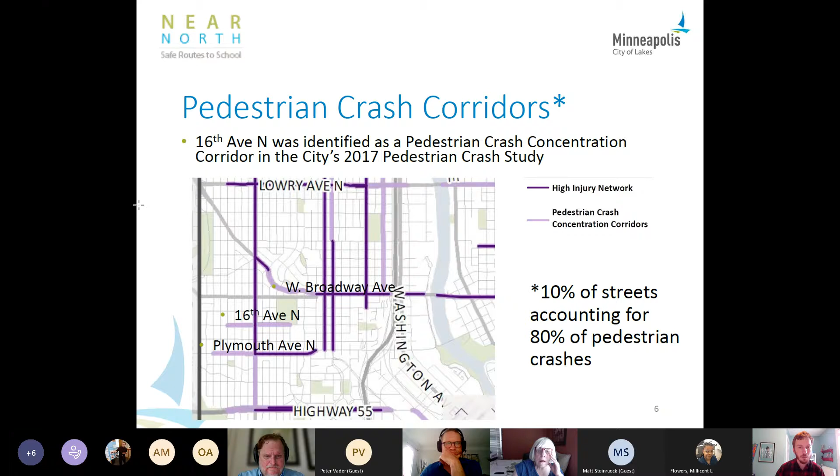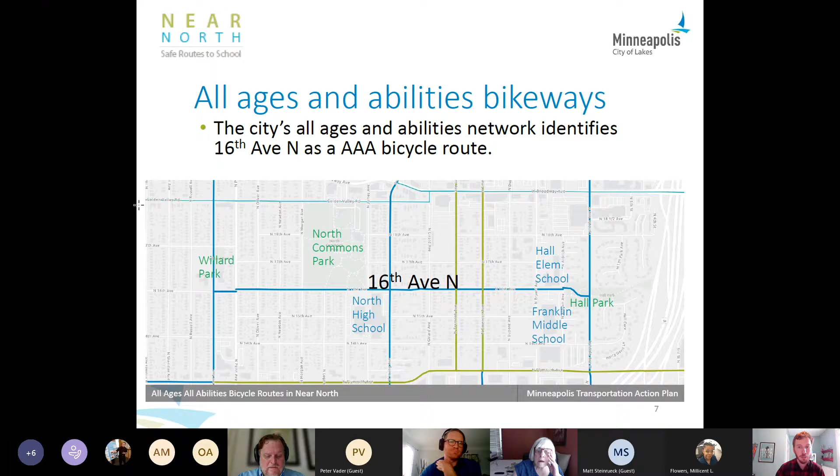This map is showing the safe routes, including 16th Avenue North in the area, and connecting the schools, North High, Hall, and Franklin Middle. You can see from the pedestrian crash concentration map, 16th Avenue near Penn is part of the ped crash corridor. And on the all ages and abilities bikeway map, 16th Ave between Penn and Lyndale is indicated.

Looking at the crash data that's available from 2011 to 15, we had 4 pedestrian crashes, 1 bicycle crash, and 47 motor vehicle crashes in that time period.

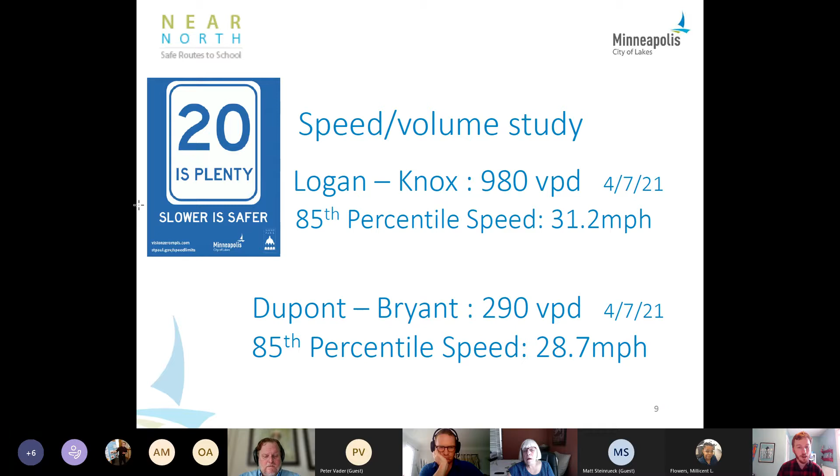Looking at speeds and volumes, from Logan to Knox near North Commons Park, we had an 85th percentile speed of 31 miles an hour. That's pretty fast, especially for a residential street, that's more like you'd see on a busy street like Penn or Emerson Fremont. The volumes are maybe a little bit high for a residential street, but not anything out of the ordinary for a bike boulevard, about 980 vehicles per day between Logan and Knox.

Some of the treatments we're using to slow down this traffic in this project would be mini traffic circles. That's a go-to tool we use in the toolbox to slow down traffic at intersections, especially on bike boulevards.

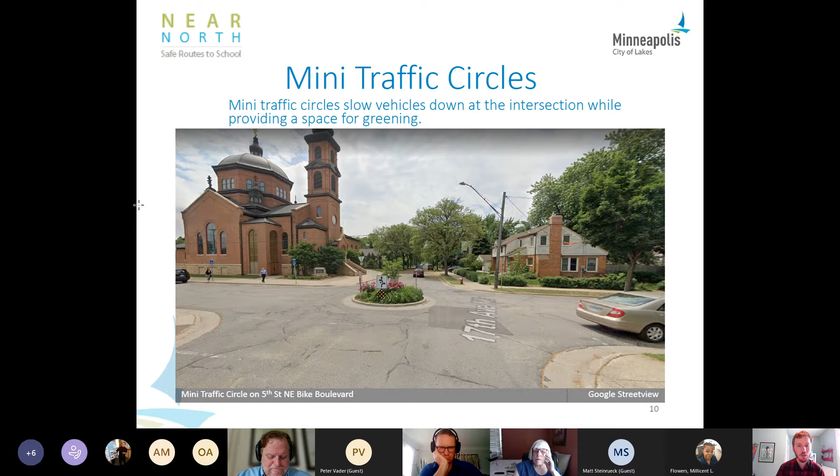Starting from west to east, Queen Avenue North is a connection point with the Queen Avenue Bike Boulevard. There'll be improvements there as part of that project, but we'll look at updating the ped ramps at that intersection. Penn Avenue was already reconstructed, so it's already improved with curb extensions.

At Oliver and Newton, where traffic is coming into the neighborhood from the west, we have mini traffic circles at that location to slow down traffic and create a gateway effect.

Near North Commons Park, on either side at Morgan and James, we have raised crossings to slow down traffic where students cross from North High to North Commons. They use the ball fields at North Commons for after-school practices and that kind of thing.

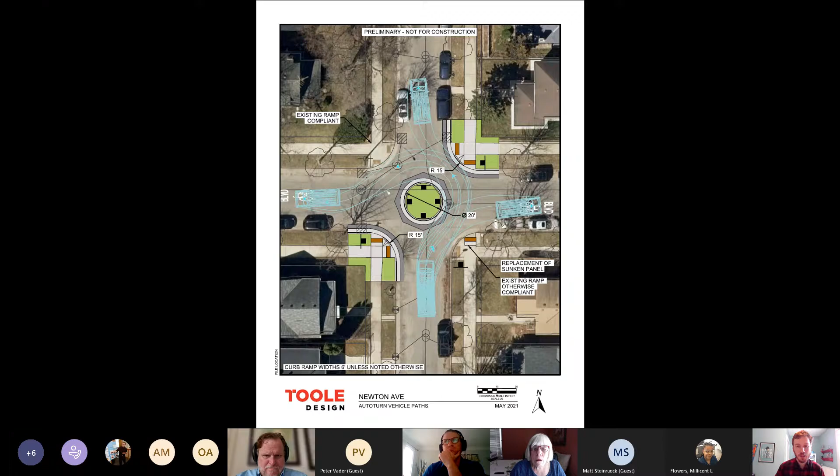As you can see here, we're updating the ped ramps as well, where those are out of date, and you see the Bike Boulevard stencils that we'll be placing along the route as well.

And then here at Morgan Avenue, at the edge of the park, there's a raised crossing, and we would likely do curb extensions to really choke down the street and emphasize that raised crossing. And here you see that as well with the delivery van design vehicle.

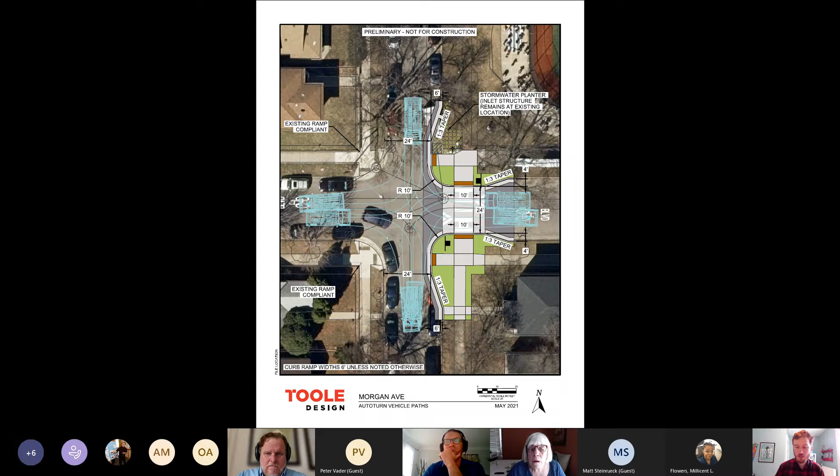So a couple of engagement events we have coming up. We just had the open house last night. And then we have a meeting with the Loppet cyclists, a student cyclist group, and then some North High after-school students that we'll be meeting with in the near future. Zan Associates is running that engagement for us.

And then later this summer, we expect layout approval in July of this year. We'll be wrapping up with engineering later this year and into next year, and construction is summer of next year, 2022. So that's my presentation, I'll take any questions that you guys have.

I have a general question, not specifically about this project, but maybe you can tell us for this project. Do you have a budget now for this, or does that evolve when the engineering drafting and specific designs are done? Or are you locked in with a budget now before citizen feedback, or does that happen afterwards? Can you talk a little bit about the funding and when it's locked in on a project like this that's got a lot of pieces to it?

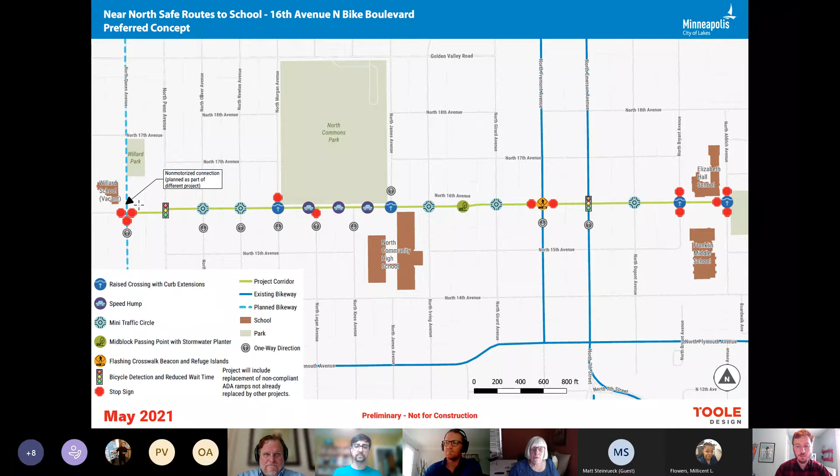Any other questions for Forrest at this time? Okay, are you looking for something from us, Forrest? Do you need a resolution? Sure, this project's at 30%, so a resolution would be good at this time. That would be great. Okay, I will work on putting something together and share it out with the executive committee. Okay, thanks, Aaron. All right, thank you, Forrest, we appreciate it. Thank you.

Now we're going to move to Matthew and the 2022 Hennepin County HSIP Safety Project. Yes, I'm going to introduce this project. On behalf of the county, I took over as a point person when Abdullahi left the city to go work for MnDOT. So I'm teaming up with Hennepin County staff, Olagoke Afolabi and Kelly Augusto, who's also on the call, and they are going to share a drawing. There are 5 different intersections. I guess we would look for a resolution today because it's in that 15 to 30% range, probably just shy of 30%. But with that, I'll turn it over to Olagoke.

Thank you, Matthew. All right, just give me one quick second here. Okay. So as Matthew mentioned earlier, this is a 2022 HSIP project in the city of Minneapolis, and it's an intersection project. 5 total intersections, one of them at Cedar and Lake Street, and 4 intersections along 42nd Street.

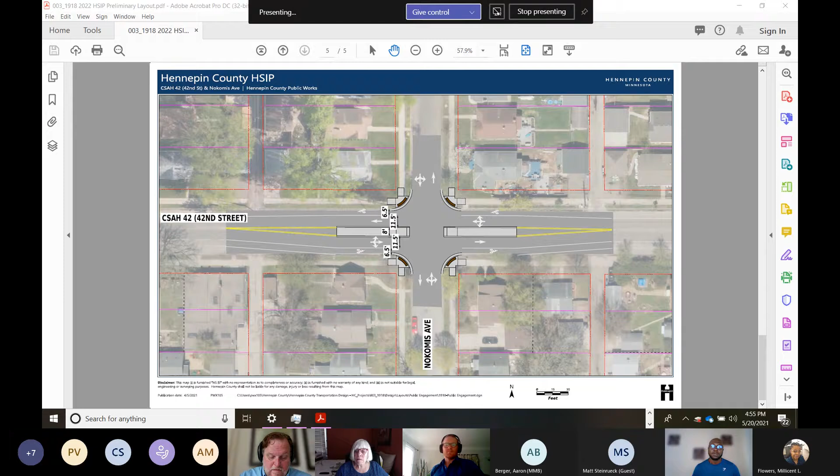As we write a resolution, are there any aspects of this that you're looking for particular feedback on, or are you at a point where you're looking for a resolution of generic support? What are your thoughts, Matthew? I'd say start with the generic, and if you have specifics, add them. That'd be my thought. Thanks.

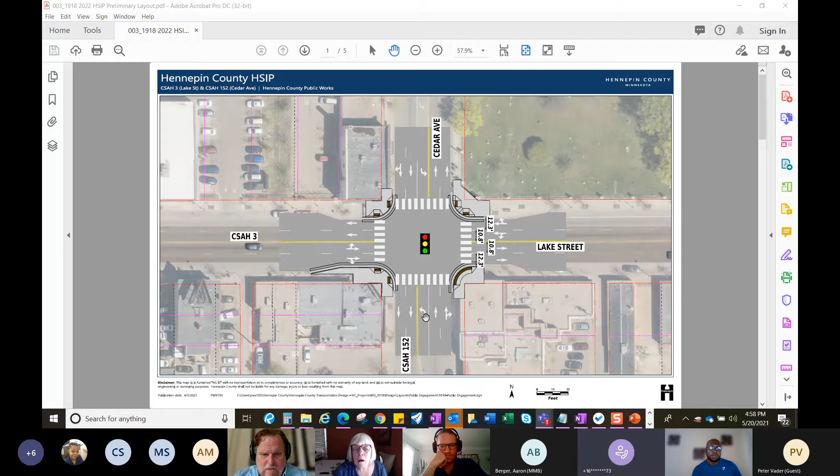I am a little curious about Lake and Cedar, and if you already answered this I apologize, but that's an intersection I walk fairly frequently, and it seems like the improvements are minimal there. Cedar is over and over just such a dangerous street. Is there any flexibility being built in, assuming that at some point we won't be okay with 5-lane speeding highways through our densest areas? Or what are you doing that's innovative, knowing the restrictions that currently exist?

We have been getting comments about Cedar being that wide, and we will take those comments back and discuss with the design staff as well as our traffic staff to see what options we have, if there's a possibility of creating a bump out. But we really didn't look at that when we were putting this layout together. Now that we've been constantly getting comments about Cedar being too wide, we'll take that back internally and see what options we have.

Excellent. I'm also wondering about eastbound 21. When I take that and there's a light at Cedar, the bus is a bit of protection when the light changes and it's still there, because drivers can't turn right. That's often the dangerous movement, the right-turning drivers on red. Is there anything that might happen there so the bus could stop as an inline stop, like by pulling the bump out further back?

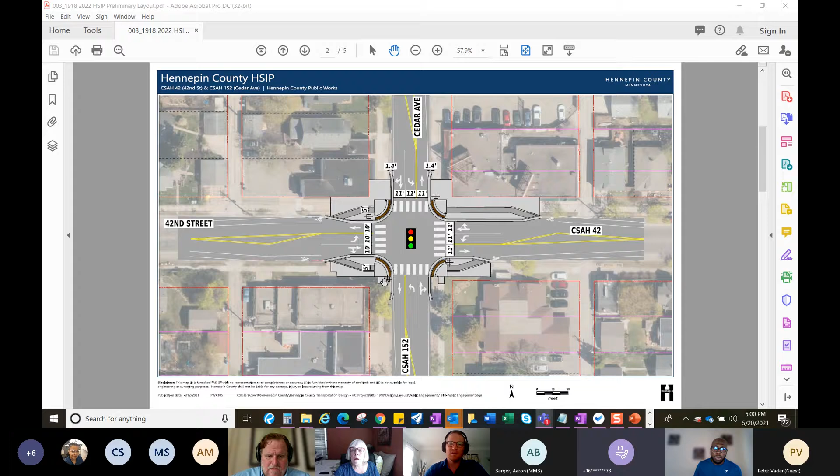Which are you talking about, this intersection or this one? Sorry, I'm just on the phone here, but I'm looking at the layout on my computer screen, and might try to get onto the next call. But it's basically the southwest corner, the north side of that block, where there's a bump out into Lake Street.

So the eastbound 21 right now stops, and it feels like an inline stop. It feels like it prevents drivers from doing an immediate right turn without looking, since they're only looking left for Cedar when I have a green to cross Lake Street. Right now the bus feels like a protection there, and I'm wondering if there's a way of keeping it so it feels like an inline bus stop, or if that's how it'll be set up.

So I should mention that there is a B-line Metro Transit project along Lake Street, and they're reconsidering what options they have in terms of the location of the bus stations at this intersection. That hasn't been finalized yet, but that's a comment I can take back to Metro Transit as we coordinate with them at this intersection.

So if I'm understanding your question, you are looking to make sure the bus can stay in the through lane to prevent drivers from trying to make a right turn. Did I understand that correctly? Yeah. Yep, and also for other reasons, but yes, in this case, yes. Thank you, and I had completely blanked on the B-line thing, so I appreciate that reminder. Awesome, thank you.

Any other questions, Barb? I didn't have a question, I just have a comment. I really like, I live very close to Nokomis and 42nd Street, and we use that all the time, walking and driving.

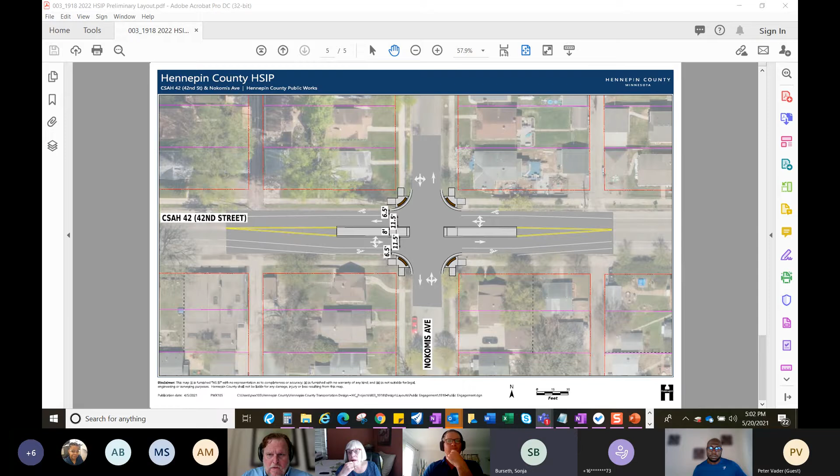Hi, yes, thank you. If you wouldn't mind going back to the Lake and Cedar layout, I just wanted to add on to what Julia was saying. The current eastbound 21 stop is near side of the intersection, on the southwest quadrant. It looks like that bump out is long enough to reach the back door of the bus, which is great, and it'll also provide extra space for amenities like the shelter we have there and widen the path. I just thought I'd add that. That's awesome, thank you.

Are there any other questions at this time? Is it possible to tighten the Lake Street lanes up to be narrower than 12.3 feet and 10.8 feet? We can take that comment back and look into what options we have if that's a possibility. That would be great if we can get down to 10-foot lanes for all of them. I mean, that's still 50 feet for Cedar, which is a huge crossing distance, but that would be great.

Thank you. In terms of lane width, typically the county tries not to go lower than 11 foot, but sometimes we have certain scenarios where we could go slightly lower. Some of these dimensions you see here, especially the 12 foot lanes, aren't the actual travel lanes — sometimes those include the curb pans added to that dimension. But in terms of reducing the lane entirely, we'll definitely take that back and see what options we have if that's a possibility.

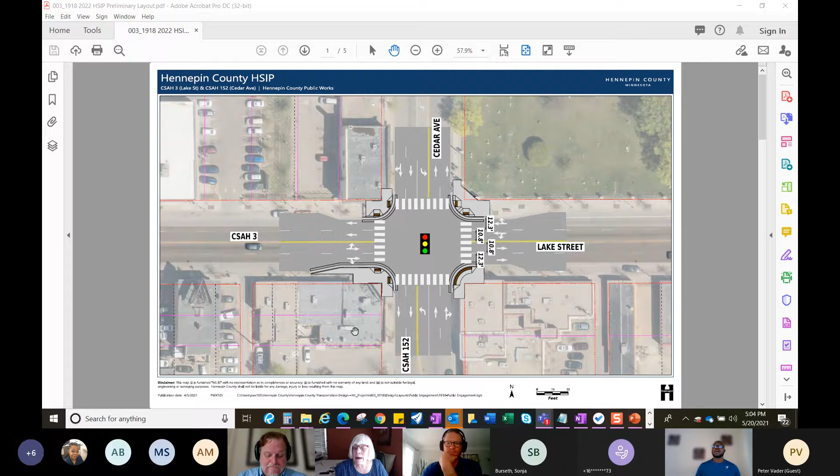That's great, and whatever we can do to have your back on that, I think the PAC would support. Sounds great, thank you very much. All right, okay, I'll stop sharing my screen now. Okay, thank you, Matthew, thank you both. Thanks all.

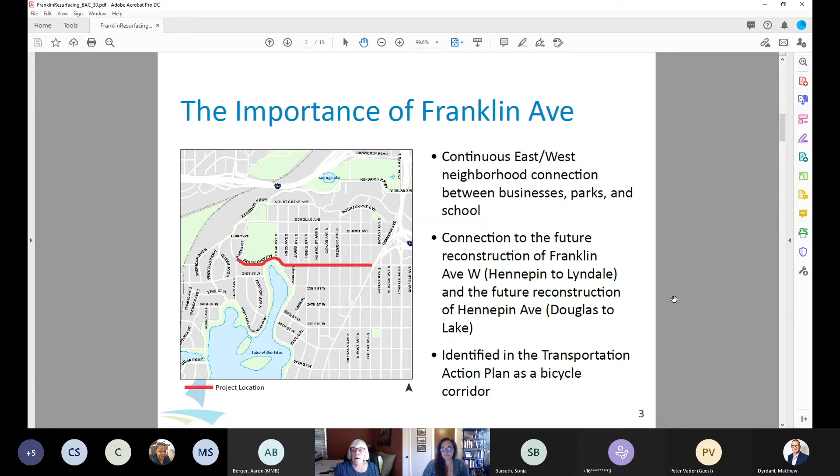Back in fall of 2020, we did some initial outreach to the neighborhood and businesses along this corridor. What we heard during that time were four main themes: the desire for slower vehicle speeds, the need for safer travel, that existing parking is in really high demand and very important for both businesses and community members, and that we need to maintain access for businesses and residents.

Taking that, we developed these project goals: first and foremost, to improve the safety and predictability of all people, regardless of their travel mode. We'll also aim to maintain all existing on-street parking due to the high demand, redistribute the space to help balance the needs of all users, maintain access and mobility for residents and businesses, and support active transportation options.

Currently along Franklin Avenue, this stretch has a 25-mile-an-hour posted speed limit as of April of last year. We did a speed study back in August of last year, and what we found was that speeds were significantly higher than the posted speed limit, the highest being at one of the three locations where we got speed data, between Girard and Humboldt, where we saw up to 33 miles per hour in the 85th percentile speeds.

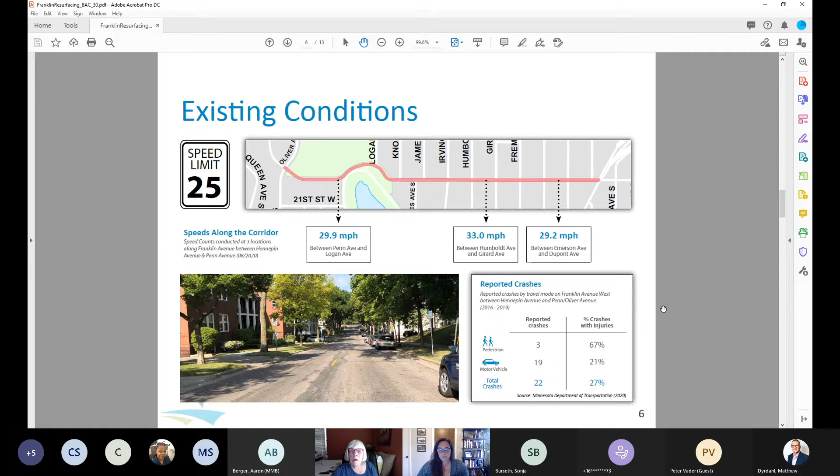Along this corridor, there are both opportunity areas and some more challenging zones. Within the opportunity areas, those are places where we have an adequate amount of space, curb to curb, to reduce the travel lanes to 10 feet and implement standard on-street bike lanes. For those challenging areas, there's just more demand for that street space, more uses, and a limited amount of space.

Those two areas are highlighted here, areas where we do have existing on-street parking: between Dupont and Fremont on the east side of this corridor, and between Penn and just west of Lake of the Isles as well.

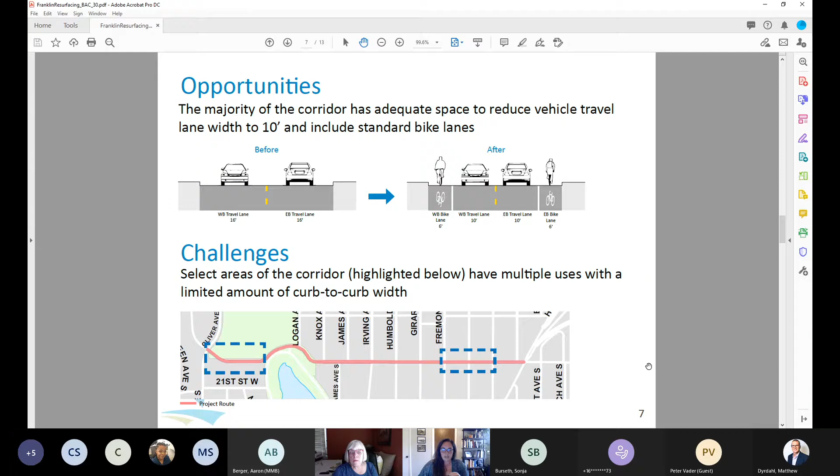Looking at these two zones, taking our policy, our technical analysis, and the feedback we've heard from the neighborhood, we've developed a concept for this project. Given the different characteristics of the opportunity areas and the more challenging zones, we're proposing two different types of bike treatments along this corridor: standard on-street bike lanes where we have adequate space, and advisory bike lanes in areas with existing on-street parking. This allows us to maintain parking for residents and businesses while still providing network continuity for cyclists.

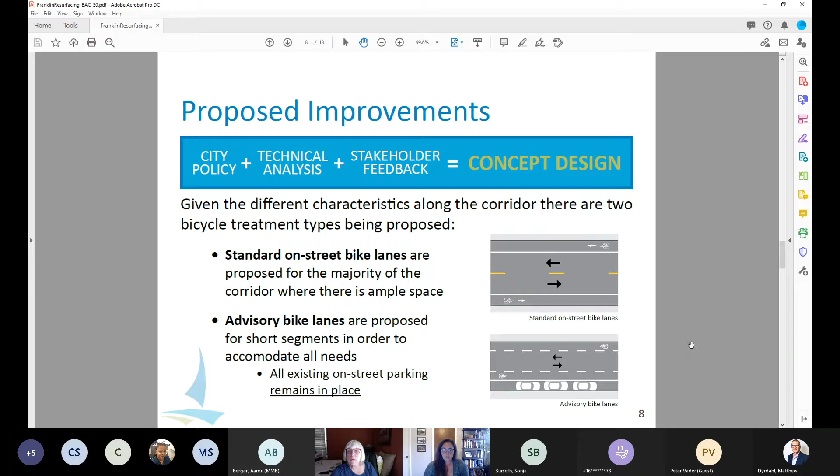For those who may not be familiar with advisory bike lanes, it's a type of shared roadway where you can expect mixing, merging, and yielding. Research shows that this type of bike treatment encourages slower vehicle speeds and reduces crash rates. We're able to maintain on-street parking, which we wouldn't be able to do with standard lanes. This also provides dedicated space for cyclists within the roadway, helping provide network continuity while also getting cyclists off the sidewalks and improving the pedestrian experience for those on the sidewalk.

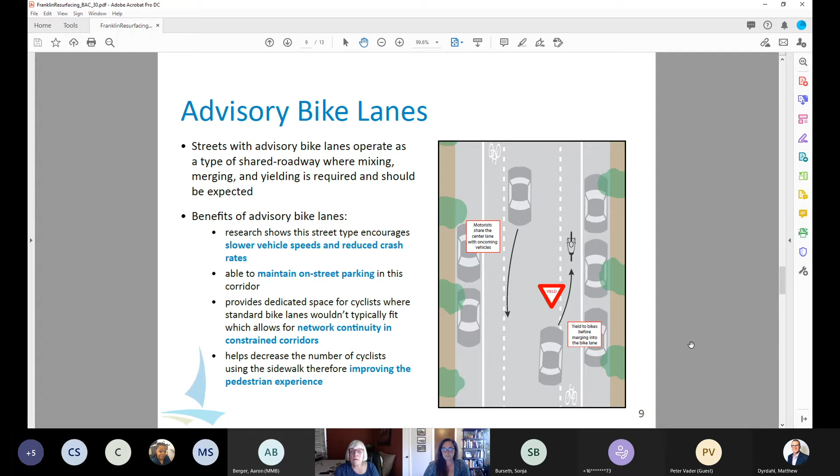In terms of timeline and next steps, we've been working through this concept since fall of last year, through the winter, and recently going back out to the public with this concept, hoping to finalize the design shortly so that we can have a successful implementation this summer. With that, I'll open it up to any questions or comments.

Thanks, Amy. Yes, Aaron, I think you're muted. That happens to me all the time.

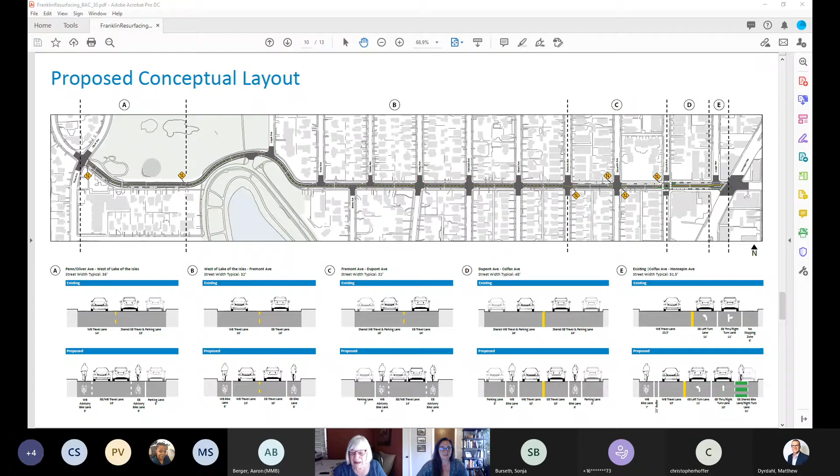Yes, we're here. Can you see my screen? Yes. Awesome, sweet. So my name is Trey Joyner. I'm Associate Planner in TPP and Assistant Project Manager for the Bryant Avenue South project. And I'm joined by Liz. Hi, everyone. So go ahead, Liz, kick it off.

So the Bryant Avenue South Reconstruction project, we're in our third phase of engagement for the project. We kicked off this project last year in spring with our existing conditions and project goal setting, and then conducted a series of engagement events across the summer getting feedback on the priorities of our project goals. Then in the fall, we had our second open house where we introduced the revised two-way concept on Bryant, which included the proposal to relocate transit to Lyndale to better meet the project goals along Bryant.

You can see here that some of the project goals were to improve pedestrian safety and comfort, create an all-ages-and-abilities facility, support existing and future transit in the area, and use green infrastructure to collect and treat stormwater runoff. That was a rather new goal included on the forefront of this project—it's not something we typically include on reconstruction projects—and also to accommodate business deliveries and customer access.

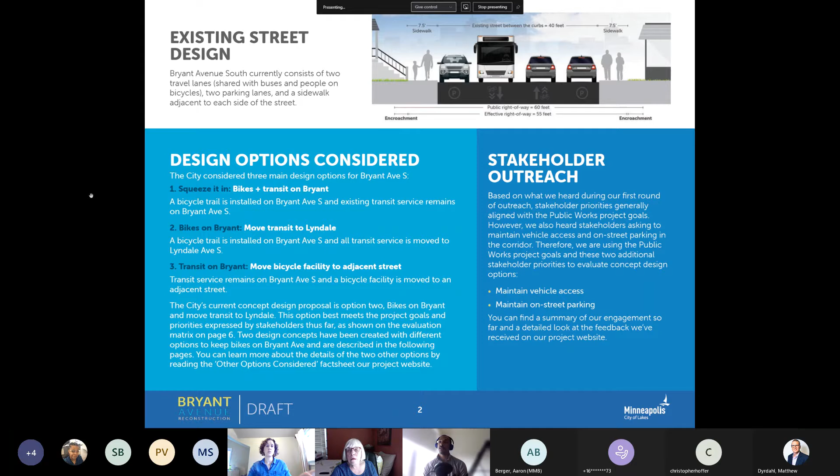For the relocation of a bicycle facility to an adjacent street, we evaluated what that would look like on Aldrich or Colfax. Through the evaluation, we found there was a lot of parking that would have to be moved on those adjacent streets, so to meet our project goals and the stakeholder feedback received thus far, we opted for the bikes on Bryant option.

One thing that came out of our second phase of engagement through community feedback was a strong desire for an alternative option on Bryant that wasn't the two-way design. That's how we came up with our draft one-way proposal on our website today. This one-way proposal still included relocating transit to Lyndale, but included more green space and a wider bicycle facility along Bryant.

This image shows our project goals and the metrics we used to evaluate all the options just discussed. As you can see, the bikeway on Bryant with one-way for vehicles better met a majority of our project goals and the two other stakeholder priorities we incorporated throughout phase one of engagement.

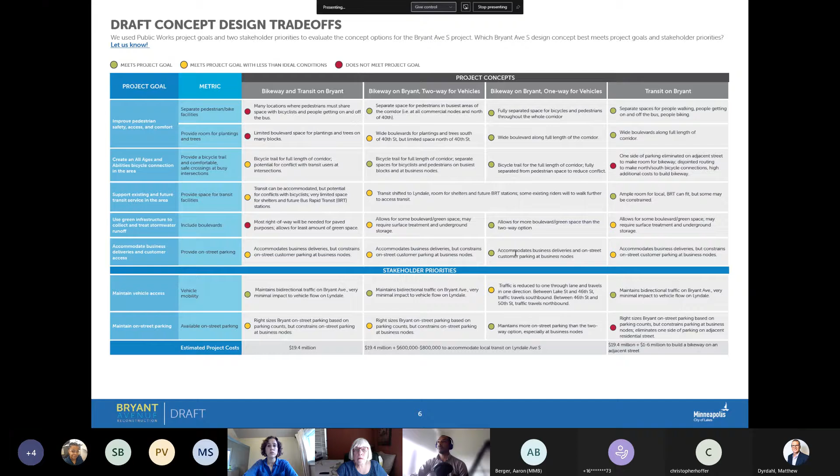Liz, you want to talk about this one? Sure. So if you've been following along since the last time we were here, we came out with that two-way design. In our current round now, we have two options for Bryant.

Our adjusted two-way is a two-way for vehicles, and the other option is a one-way street for cars. We're proposing the one-way in direct response to two main concerns we heard from folks about the original proposal we came out with in December. The first concern was about pedestrian and bicyclist conflicts on the shared use path.

On the two-way, there was a section south of 40th where we proposed shared space for pedestrians and bicycles so we could max out our boulevard space in that area. Under the one-way, we're able to separate out space for the full corridor for bicyclists and pedestrians. You can see this picture here in the right-hand corner, and an example of what that looks like.

The other main concern we heard was about parking availability at business nodes. The one-way allows us to add back in and maintain more on-street parking in those highly used areas. It also lets us add more green space to the corridor, specifically where we need it to treat stormwater. We've done an initial evaluation of opportunity areas for green infrastructure, and under the one-way we're able to carve out more space for boulevard plantings and future green infrastructure.

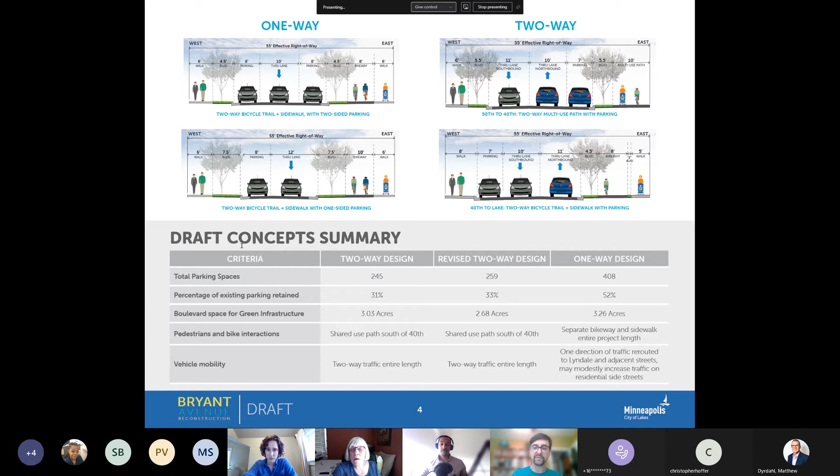Hi, I'm wondering if there's any modeling that could be done to understand how traffic speed would be affected by choosing a one-way versus a two-way option. Modeling on Bryant itself in terms of speeds?

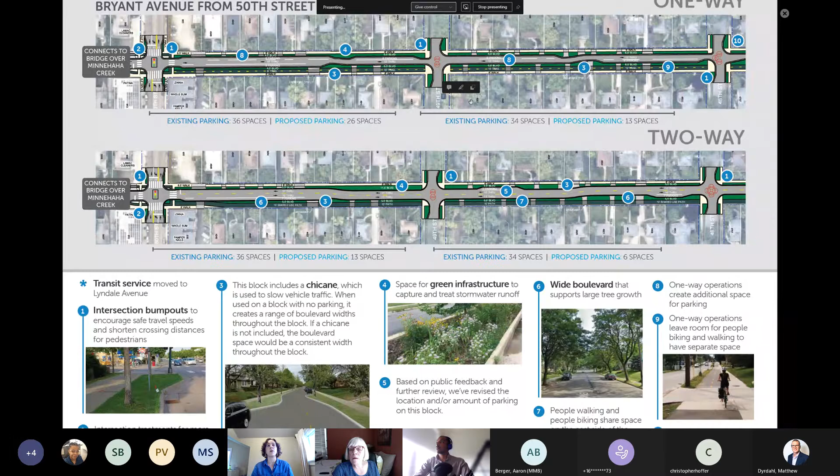Probably not existing modeling that we would look to do, but what we'd really look at is some of our other one-way streets that are much more similar to what this design looks like. We've definitely heard concerns from people about one-ways and speeding, but the examples people are thinking of, like the Blaisdells, the Park and Portlands, are just really wide streets. This design is much closer to a parkway design, where we have constrained, narrowed areas in the middle where we're adding chicanes, elongating those on streets where we know parking usage is low, and a very narrow entrance at each block. So a lot of traffic calming designs that we know work well in our parkways. So no, not modeling per se, but we'd look to existing designs that work well within the city.

Thank you. I'm super curious about, sorry. Go ahead, Julia, that's fine.

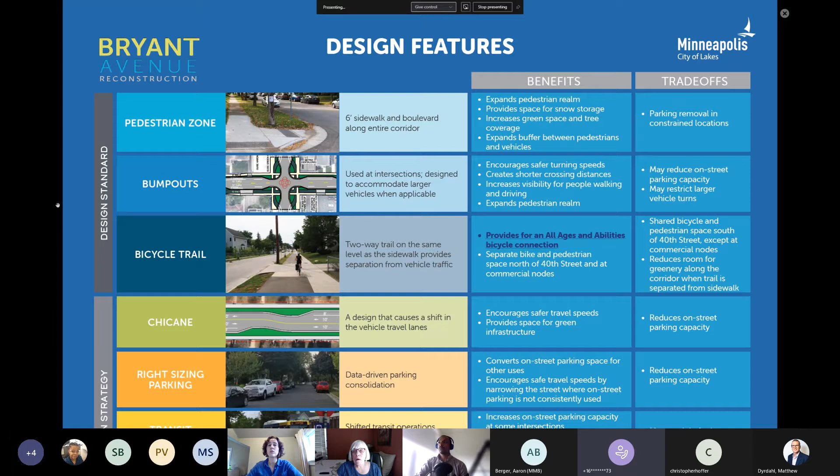I'm super curious about what you mentioned about diverting vehicle traffic from this street onto others. I'm wondering if you've looked at what the air quality impacts would be, what the air quality is currently. It's interesting to me that 20 to 35 vehicles is seen as noticeable for a side street, but 65 to 100, and all the health implications of that, is negligible for everyone who lives along Lyndale. I'm hoping we see our city using the full street network rather than forcing pollution onto our highest density residential corridors.

Nope, we haven't done those types of emissions studies. I'd say that generally, if we're expecting today that there's 2,000 to 3,000 vehicles per day on Bryant, approximately half of those would be diverted to go somewhere else. Potentially they would end up on Lyndale, or potentially people would use a different mode of travel to make some of these trips. But no, we have not done any modeling on emissions.

I'll just note too that going with a one-way design gets us bigger boulevards and more ability to treat stormwater. So while it doesn't speak to air quality, you are getting environmental benefits, or at least stormwater treatment along Bryant for the relocation of those trips.

I'm totally sold on it. I'm just curious, it seems like what we often hear from designers is that we cannot consider side streets as part of the network when looking at vehicle volumes, and pedestrian safety comes at the expense of, heaven forbid, putting vehicles on parallel side streets. This may be more for county engineers than the city. So seeing you do this, I really appreciate it and hope this is what we see more of.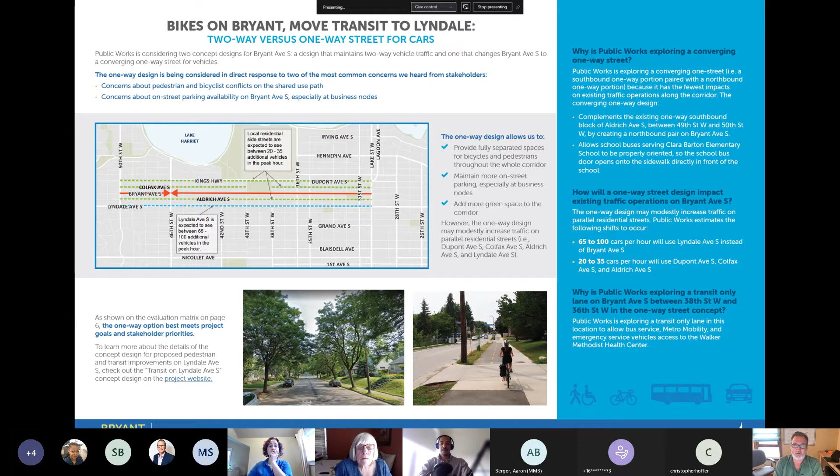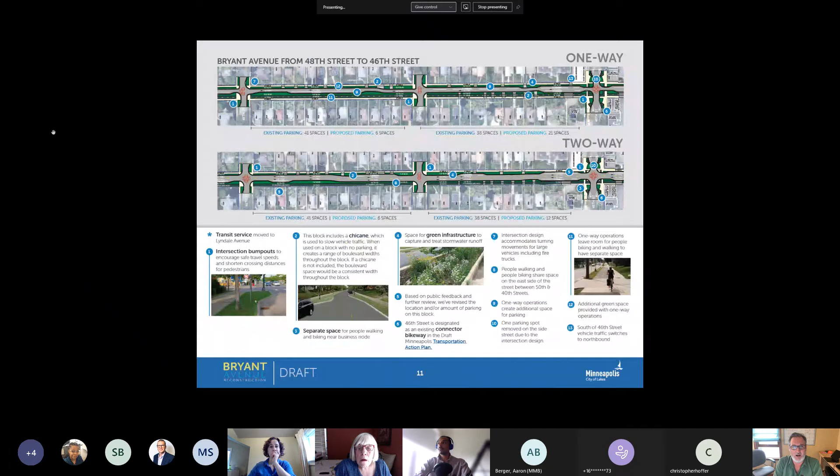On the one-way design, two lanes of vehicle traffic going in the same direction, I was much more heartened about chicanes for a two-way street like Grand Avenue. What other calming methods? I don't think the parkway, in my experience, is pedestrian friendly, that saying city parkways work for people out walking, I don't agree with that. So anyway, do you anticipate more traffic calming, more positive effects on slowing cars down within the one-way design?

I guess I'm not totally following the question. Are you saying, are we looking at more traffic calming with the one-way versus the two-way? That's what I was asking. I made it hard.

Yeah, exactly. Two lanes going one direction means faster vehicles, versus one lane going each direction, so a car coming the other way will slow traffic, will have some calming effect. So that was my question: what, if any, additional calming methods are incorporated in a one-way design?

Sure. I think the biggest one is that we have these really long stretches of very narrow areas in the places where we know we have speeding issues today, which is pretty much south of 43rd or 46th. I'd have to pull my existing conditions, but it's really where we know the parking isn't getting used, so it's where we have that really wide open space.

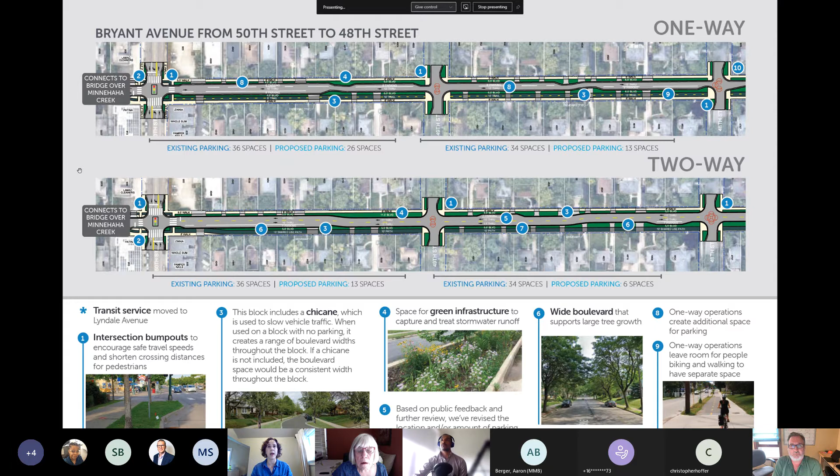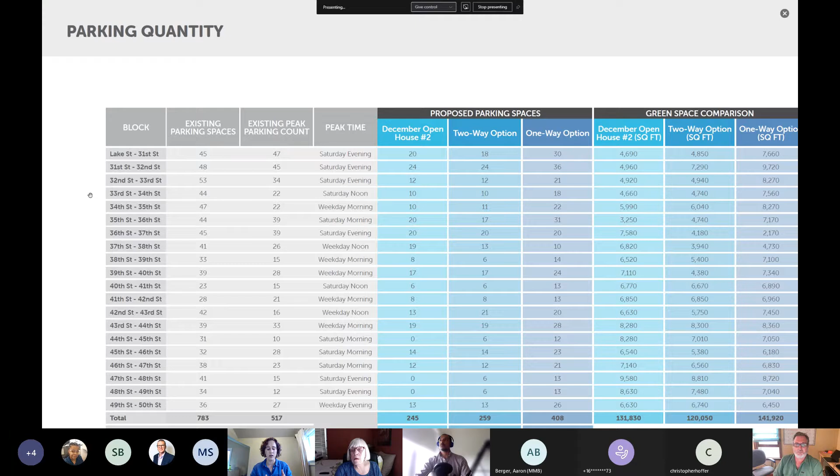Throughout this whole project we're right-sizing parking. We're removing 50% of the parking in the one-way proposal, and almost a little less than 70% in the proposed two-way. So by having those really long, narrow sections and narrower entrances where people come into an intersection, that's the way we're looking to mitigate speeds on the one-way.

All right, thanks, Liz. Barb, I think you're on mute.

Thanks, sorry. My question is the two-way, is it southbound? So all the one-way would be southbound, all southbound traffic? Or is it? Good question, I should have hit on that, I forgot about that in my spiel.

Trey, can you go back to that overhead graphic? So we're actually proposing a converging one-way. What that means is we're looking at a southbound one-way from Lake to 46th, and then a northbound section from 50th to 46th.

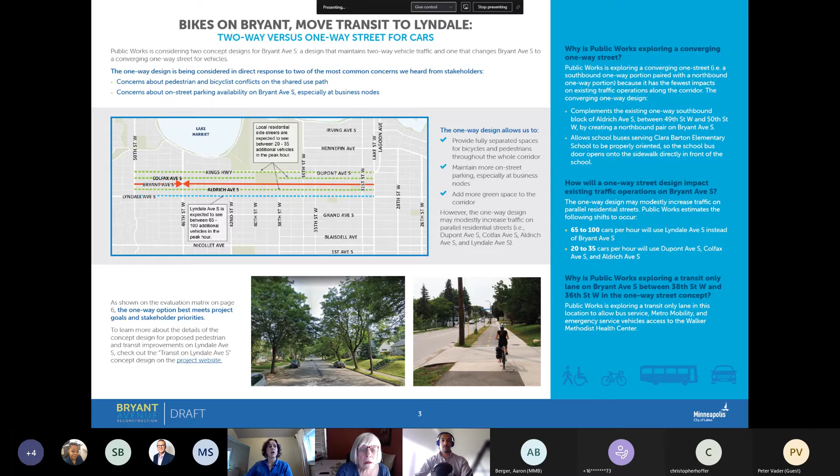Couple reasons why we're looking at that. One, at the outset we did our traffic modeling and tried to see which way people are typically going, if there'd be more spillover with one versus the other. It was kind of six of one, half dozen of the other, didn't really matter if we were looking north or south.

So then we start looking at land use context and what we need to do to serve the existing land uses in this corridor. Really the big one for this big chunk of southbound that we're proposing is Clara Barton School. Trey, can you go to the next slide for me?

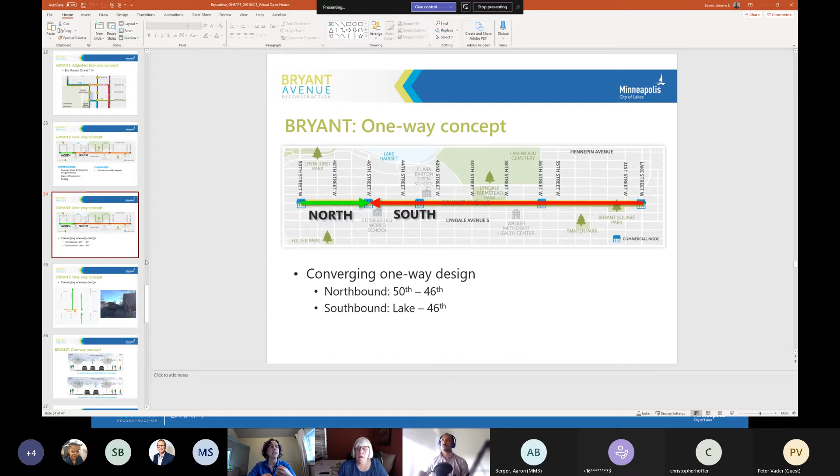Thanks. So, you know, in the background, but if you think about a school bus, it's only got one door on one side. We wanted to make sure that when buses are accessing Clara Barton, they're able to keep that door on the same side of the school. So that was a really big driver.

The other driver was an existing traffic pattern down at 50th and Bryant, where there's an existing one-way pair on Aldrich, actually, between 49th and 50th. That's to help with cut-through traffic and speeding for people trying to get around some congestion at 50th and Lyndale. So we're trying to avoid having two adjacent one-ways right next to each other.

But then the other reason is that at this intersection at 50th and Bryant, for people visiting the area by car, being able to access the parking on the block between 49th and 50th - so if you're accessing a regional destination, coming on the regional system from 50th, you'd be able to turn north onto Bryant to get to some of that parking. So those are kind of some of the big drivers behind the converging one-way proposal.

Other thing to note is that people are really making short trips on Bryant. Only 4% of trips on Bryant are actually going end to end, the way people use Lyndale for. What we saw on Bryant is that people cut over on 46th, or cut out on 43rd, go to a specific destination, and only go a couple blocks and then leave Bryant. So it's not like we're seeing really long trips happening on Bryant.

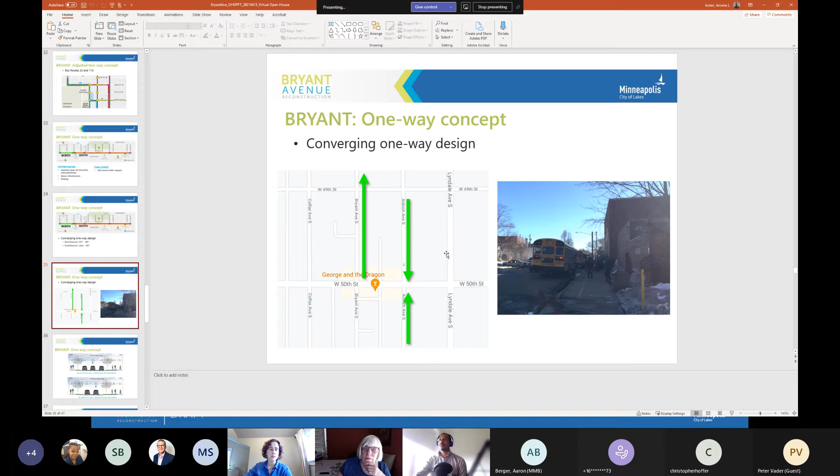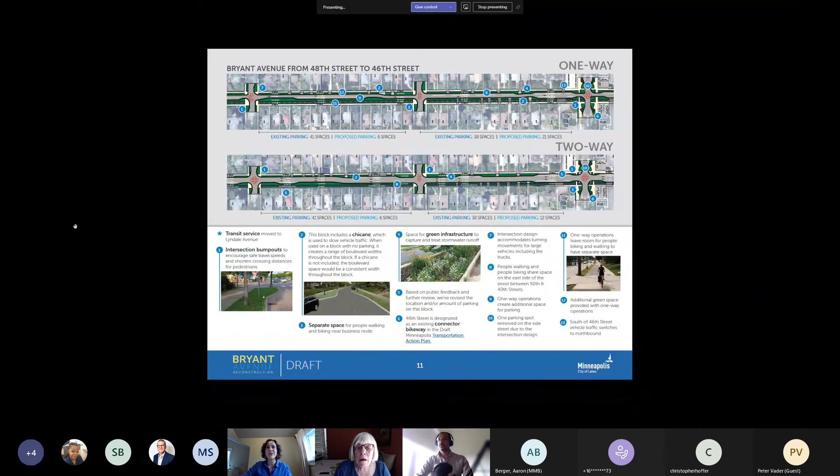What is the lane width? Is it 10 or 11 feet? What are you proposing for the one-way, the two lanes? Hold on a second, sorry, I can't see that for some reason. Let me scroll in here. It's really little. Oh yeah, I'm scrolling in. Yeah, I got you. Okay, cool. Oh, big. So that's the two-way.

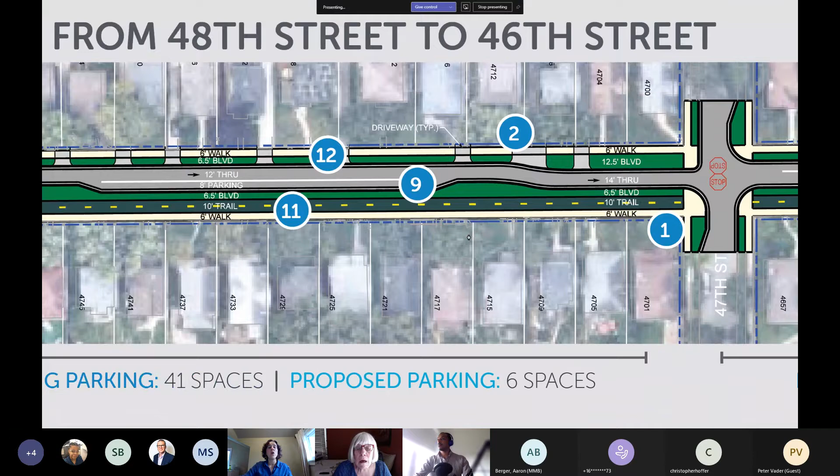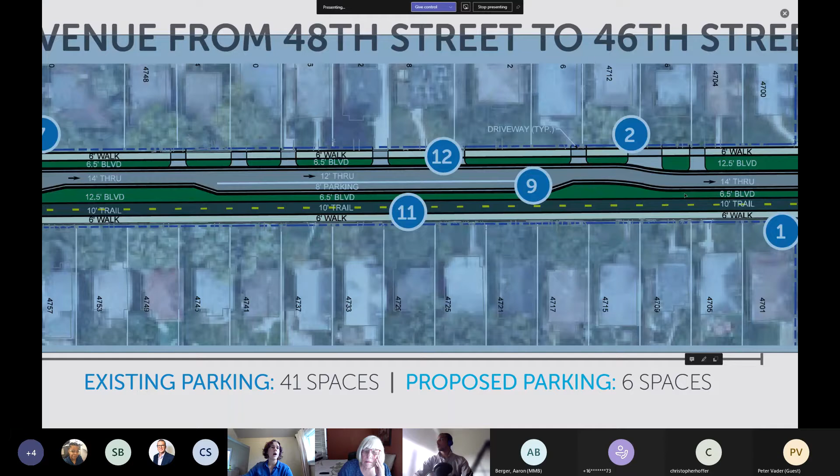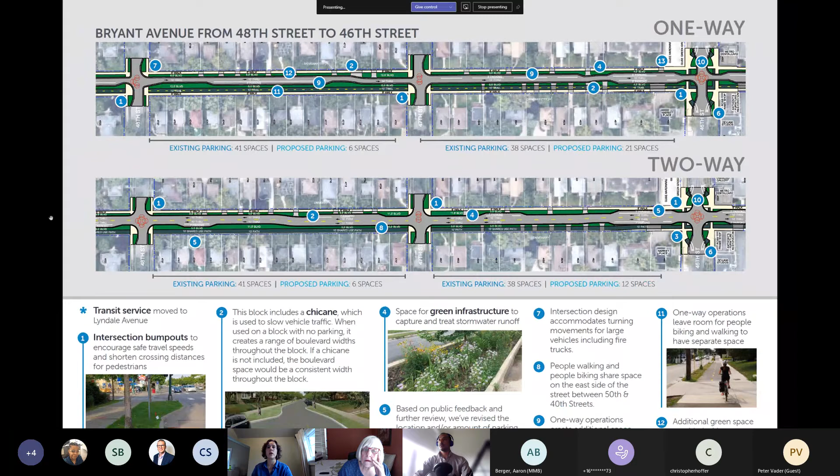So at the narrowest section, it's a 14-foot lane, which is inclusive of a 2-foot gutter on either side. When it's adjacent to a parking lane, it's a 12-foot through lane, but for you guys in the know, it's a 10+2, so a 10-foot through lane with a 2-foot gutter pan. And then when it goes down to parking on two sides, it goes to a 10-foot through lane if we have two parking lanes on either side.

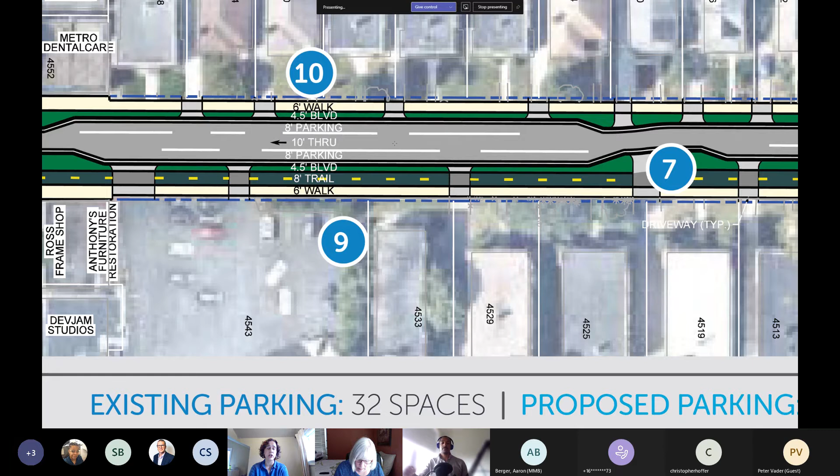Okay, and you're going to be coming back. You're at 15%. Will you be coming back, Liz? So this is 15, we're getting really close. We are planning on coming back with a final 30%. Okay, and that's when you'd like a resolution at the 30%?

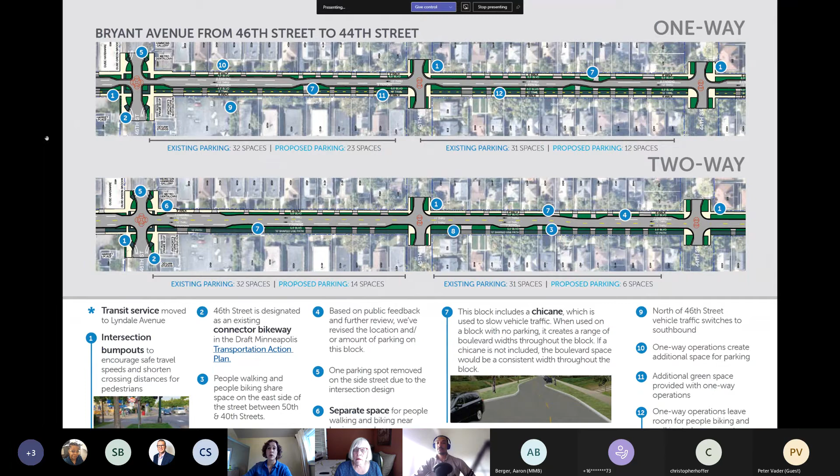Actually, I think it'd be probably more helpful now, frankly, if you guys wanted to weigh in on the one-way versus the two-way, and then just the overall idea to move transit to Lyndale, because we also have a whole bunch of information on that. If people are interested, check out online. But that is a huge piece of this as well.

Any other questions? And just for Liz and Trey, I think the committee would plan on having that resolution ready for the full committee meeting coming up. So we'll get that to you. Okay, great. Awesome. Thanks, Matthew. Okay, thank you, Liz. Thanks, everyone. Thanks, Trey. Thanks, Liz. Thanks, everyone. Have a good night.

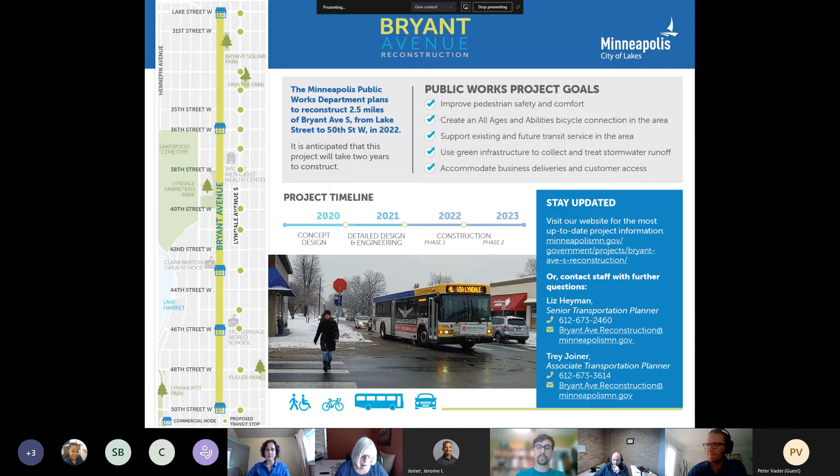You too. Okay, last but not least is the Upper Harbor Terminal on 33rd Avenue at 15% with Alexander Cato from Minneapolis Public Works, and Ciara and Chris from Toole Design.

Hey everyone, Alexander Cato here. Can I get a thumbs up if you can hear me clearly? Great, awesome. So first of all, thank you all so much for having us here today, and for all the work you all do to ensure that the designs the city puts forth are bicycle and pedestrian friendly. I have Ciara and Chris from Toole Design on the call with me as well. We'll be talking about this design as briefly as we can and then opening it up for feedback from you all. This is a bit unique.

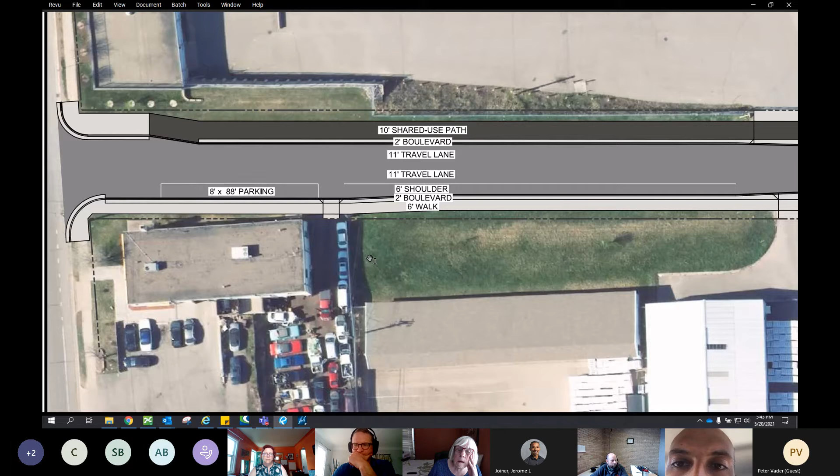Chris, if you want to just- yep, Libra's right there. They have about 25 trucks a day, so they're doing a lot of in and out movements as well. So the roadway design accommodates that.

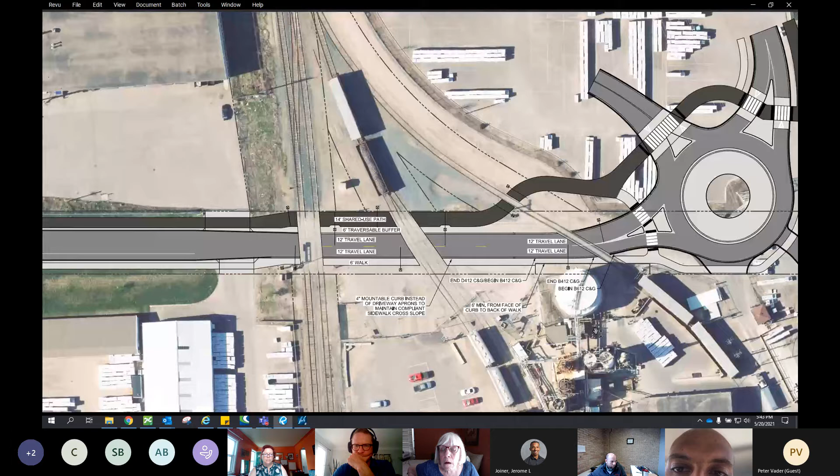We also have a 6-foot sidewalk here. This carries to the east across the tracks and continues into a roundabout design as well, which goes into the Upper Harbor Terminal site.

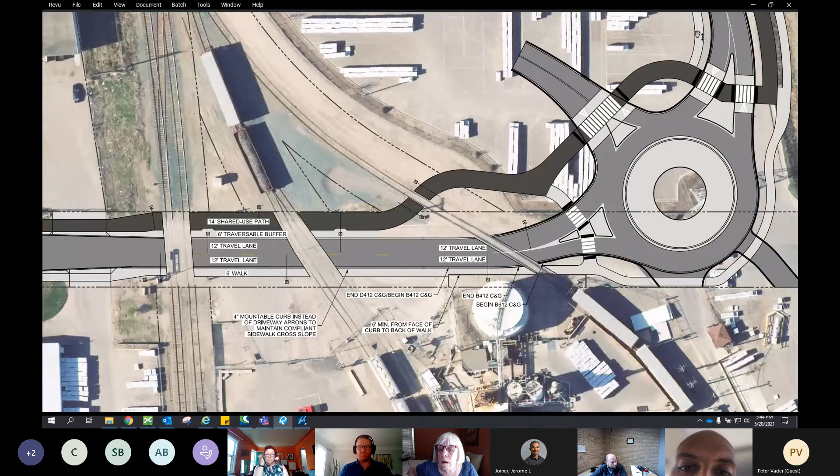The real crux of this design, and you'll see how it differs in the second design, is we have a sidewalk on the south. It's passing this GAF facility, which has a lot of truck activity. And the real crux, to be honest, is do we feel safe having pedestrians travel along this portion of the roadway, knowing the amount of truck activity that is occurring? If you want to move to the second option, Chris.

There you go, Chris, that's the second one- move to the second. Yep, what's up? This is option B. Oh, I'm sorry, or the first one. There we go, without the sidewalk.

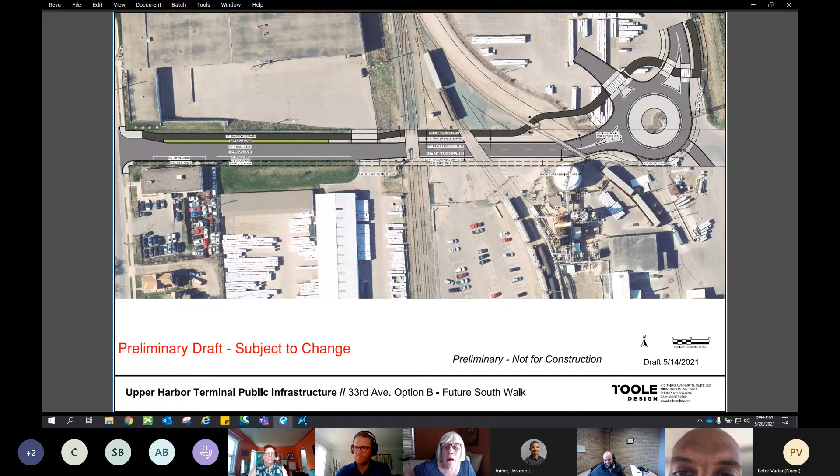Okay, thank you. So in this option, we removed the sidewalk to the south, expanded the boulevard on the north so there's a bit of a green buffer, and left the sidewalk for a future development as an alternative option. So there are really two options: one, we keep the sidewalk in; two, we take the sidewalk out.

From a city policy perspective, there is some flexibility. Section 3.2 of the street design guide talks about the inclusion of sidewalks and says sidewalks should generally be included on both sides of any newly constructed street. Streets that may require sidewalks on only one side include a street with a severe topographic constraint that makes installing a sidewalk prohibitively challenging. The southern side does have a berm in place that adds a lot of grading challenges with the sidewalk, so there is some flexibility. I think generally city policy likes sidewalks on two sides of the street. We have that as an option, and really just want your feedback on that.

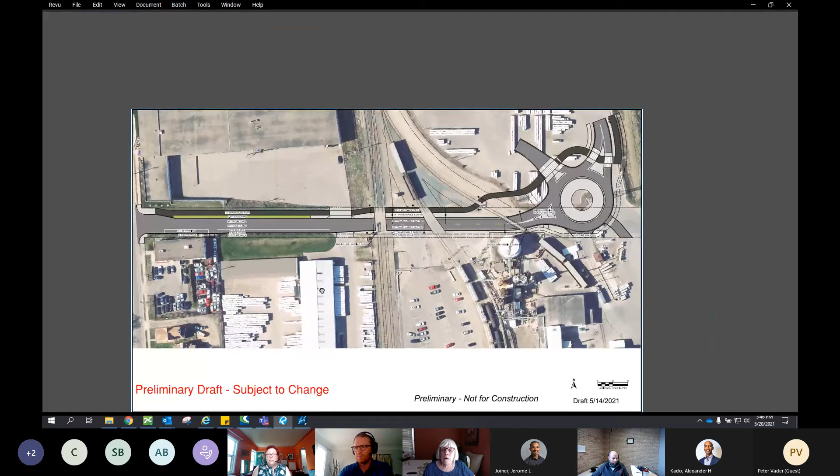I will transition it now to Chris and Ciara to provide a bit more detail on these designs, as they were heavily involved in that. All right, thank you, Alexander.

Just a few more details to point out, which are on both. So Chris, just go ahead and keep this up. You may wonder why the shared use path squiggles so much. There are active rail lines in this area, and so that is intended to square up the crossing across the railroad tracks and then provide a more direct path to the roundabout.

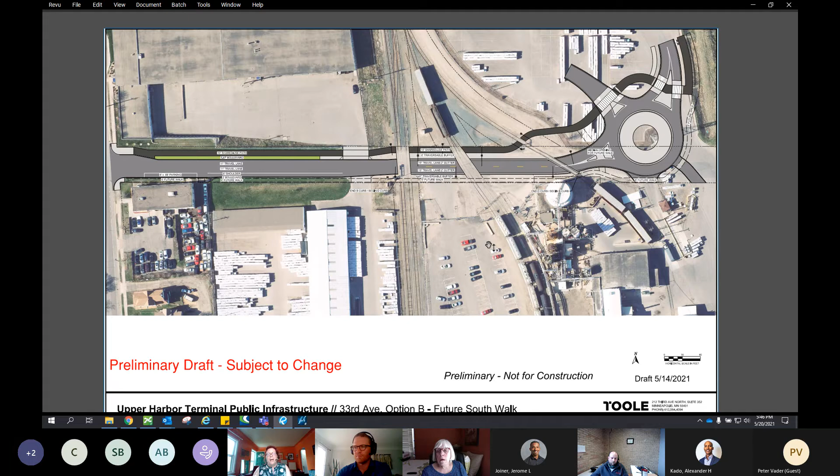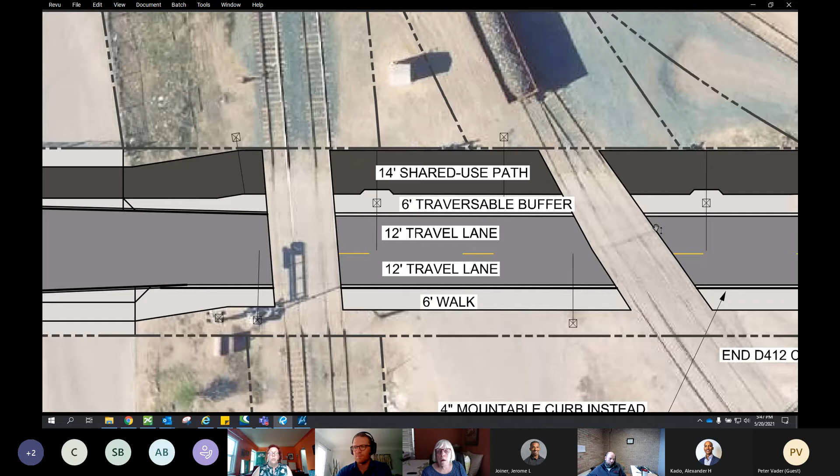I want to mention too, in option A I think you'll see a 14-foot wide path, and in option B it's 10. It's not like we have to say oh, we can't do a 14-foot wide path. There's just some considerations with the active rail crossing arms because they do kick out when they go down, and so with the wider shared use path there is kind of a jog that may not be as intuitive for navigating, especially if people have vision impairments. So it's kind of a notch in the shared use path.

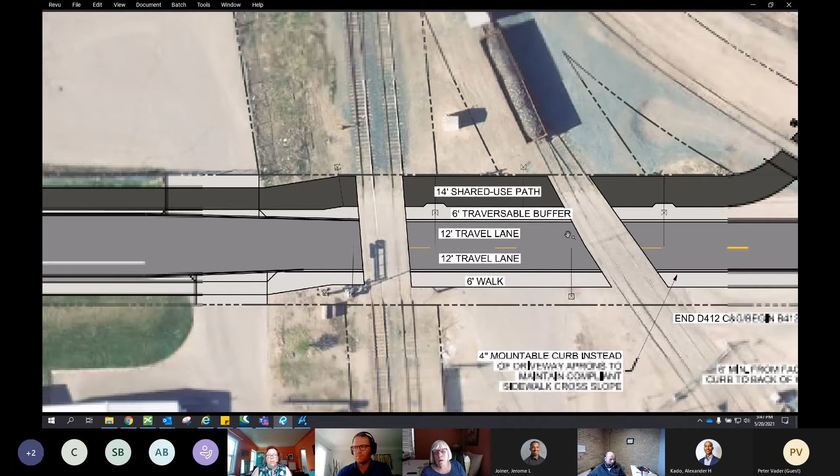Then if we go further to the east, I wanted to point out that the crossings of the shared use path are raised. There will be a lot of truck traffic again using this roundabout to access the private development within the Upper Harbor Terminal site. And as Alexander mentioned, GAF has some loading docks and access points along that roundabout as well. So wanted to point out some of those design details.

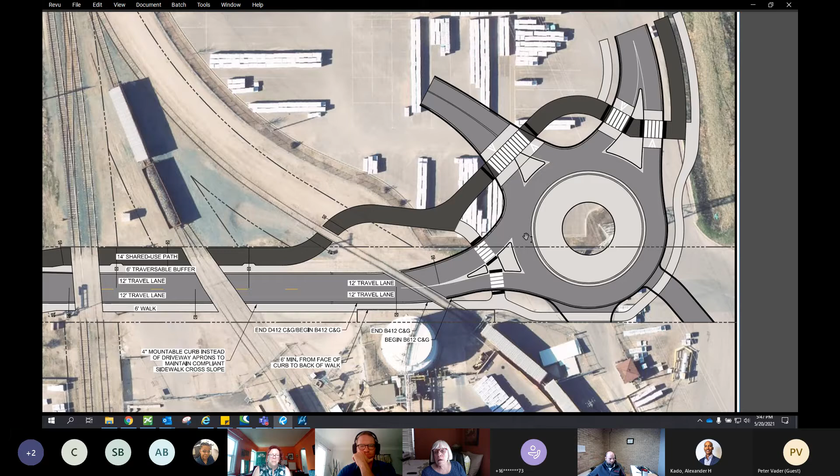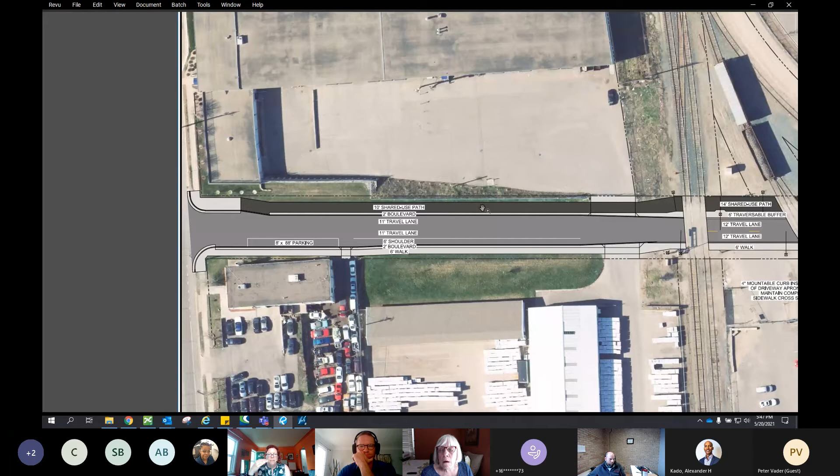And then Chris, if you can pan to the west one more time. I wanted to also point out there are topography challenges with the north side as well. There is a very steep grade change. In fact, there is a retaining wall at Libro there.

And although the right-of-way line is in one place, we really can't build that out without easements from the property owners or additional right-of-way. So by all means, we can definitely create the complete street with a shared use path and a sidewalk on the south side, both of which are back of curb.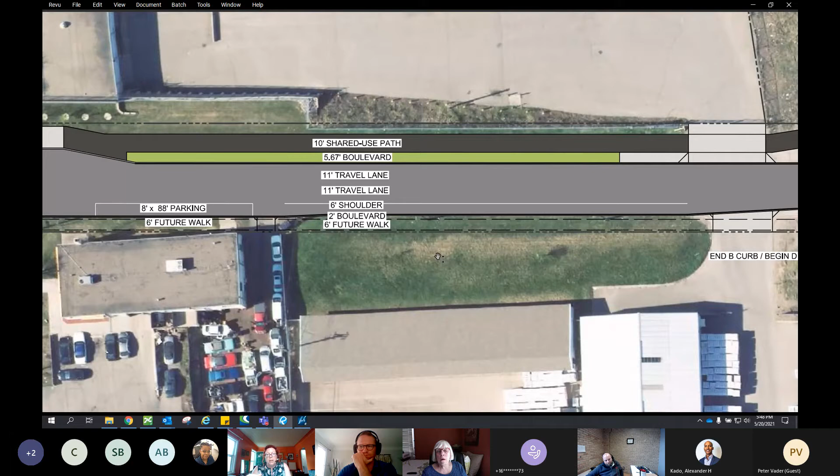If we do look at an option to accommodate that sidewalk on the south side through redevelopment, then we can have a larger boulevard along the shared use path, if Chris wouldn't mind going to that option. And then the future sidewalk itself, instead of being on the back of curb, could have a boulevard as well. So with that, we'd love to hear your questions, comments, concerns, what have you, with these two designs.

I've got some pretty major concerns about the fact that we're even seeing something proposing a sidewalk gap in 2021, and especially for 100 trucks a day. City policy is really clear that we provide walking infrastructure. Complete streets is clear. Transportation action plan is clear. And it's bizarre to me, as somebody who walks along things that have terrible slopes.

I'm curious if you can share with us more about the slope, but the volume of vehicles that pedestrians encounter along any given block appears never to have previously been a concern in the city of Minneapolis, and to use it to justify the absence of a sidewalk, I'm having trouble wrapping my head around it.

Yeah, Chris, if you wouldn't mind panning to the east. I just wanted to mention, it's actually 150 trucks per day, and it's not just that they're going down the street, they're maneuvering their trucks forwards and backwards across where the sidewalk would be, between the railroad tracks and the roundabouts. So that is a picture of some of the truck turning movements and activities that happen there.

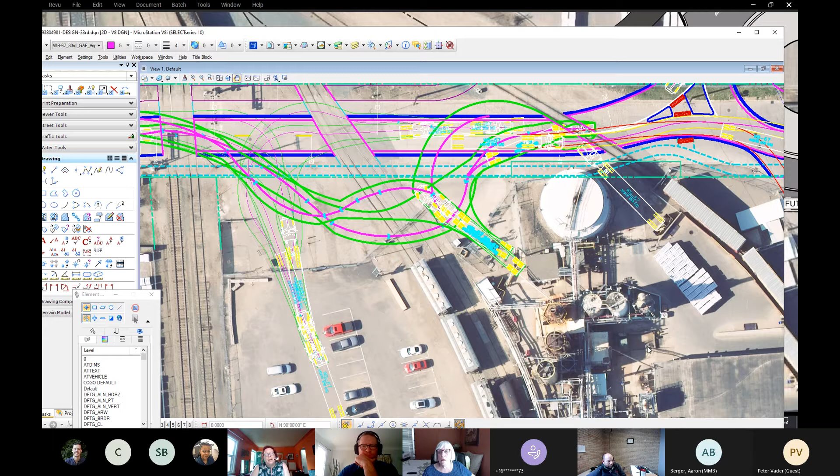But, you know, by all means, city policy doesn't say don't put a sidewalk in because of truck activity. That exception is really for the slopes, which are on the west side of the tracks.

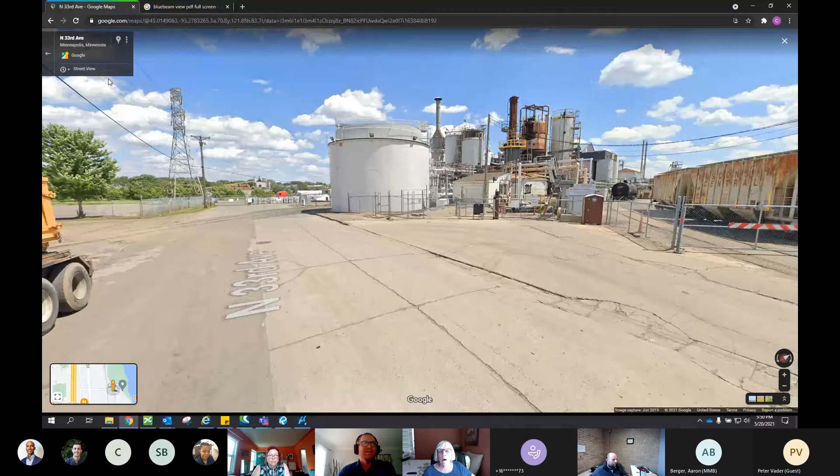Could we see the slopes? Because I have a... can you describe, when I think of a severe slope... I think that's not what that sentence meant in the guide, and it's not like the sidewalk is prohibited. It's the choices that we're choosing. There's room for the sidewalk with other trade-offs, so I'm concerned about using that sentence in that way, but...

Yeah, the implication with the slope here is that we would need additional right of way to make this happen. You can imagine if we widen out the road here, we'd be eating into the side of this hill. There'd need to be some kind of retaining wall here or additional right of way to grade that out. That's the implication with putting the sidewalk there.

And then, Chris, could you show it? It may be deceiving. It looks like it's very flat on what you can see on the other side, the north side of the street. But over by Libra, you can see it's very... it drops off behind that fence.

They access their trucks there. I'm only able to see the slides that have been shared, so can you describe what you're showing? Yeah, or let me know which slide I should be going to. That's okay, so when we're looking at this, what slide is this?

Slide 3. On the south side of the roadway, on the bottom part of the roadway, behind the walk, there is a grass berm, and it looks entirely flat in plan view, but it's actually a little bit of a rise. So the idea here is if we were to build a walk here, we'd be eating into that berm a little bit, and we need perhaps a retaining wall along the right-of-way line, or we need additional right-of-way to make that happen. And then on the north side, what is the barrier?

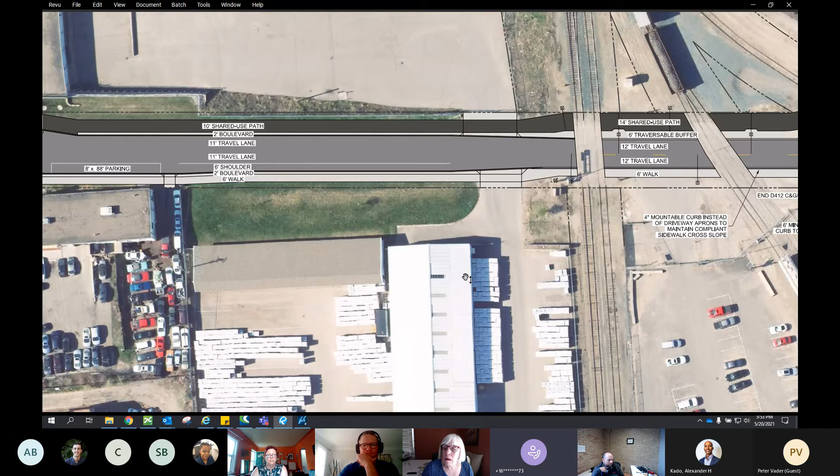So that's a pretty standard approach we have to any roadway design for that matter. But having cars on a road greatly magnifies the cost of a project. Pedestrian infrastructure, we don't wear out roads or sidewalks even. This seems like a small cost given that pedestrian infrastructure can last hundreds of years, and making it so people can travel easily without vehicles is key to reducing our infrastructure costs.

And I'm muting myself now, but thank you for continuing to explain. Barb, I think you're muted again. I try to do that.

Are there other questions or comments? I guess, yeah, to be sure at the driveways, that they're shown for the professional drivers, that's pedestrian space, that it doesn't blend into the parking lot as much as it does here. It shows clearly that it's a sidewalk and trail and path.

That is a really good comment, and that's going to be something that's really important, especially if the sidewalk is built on the south side, because right now this is just a giant sea of pavement. I think it's going to be super critical that if this walk goes in on the south side, that we somehow differentiate it and also provide a detectable edge so someone with a vision disability can know where that walk is and it doesn't just vanish into the giant parking lot. It's going to be super important. Agree completely.

Christopher and Aaron?

Yes, this is just sort of a general comment, and I don't know how helpful it will be. I recognize that this is a challenging situation with the trains and the trucks, but just for me personally, I wouldn't walk there. I think it's too dangerous as described. I am including both the sidewalk gap, the jogs necessary for the train tracks. I don't know what kind of chutes you're going to use that make people look left and right, and what kind of markings and signing. I just think it's not there yet. I like if this was to be built, I don't think I'd walk there.

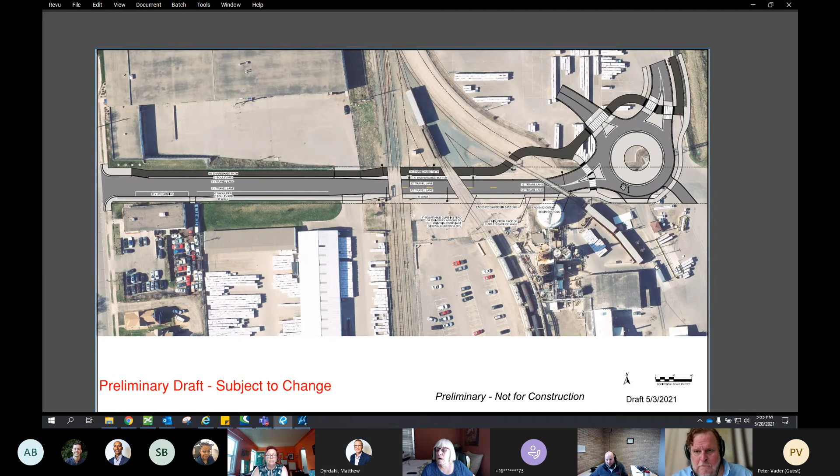Yeah, that's a good comment. I can provide a little bit of detail on the accommodations for the railroad crossings. You can kind of see here on the north side, based on MnDOT guidance, we will actually have crossing arm gates for the shared use path. So every single track will have a set of gates for the shared use path. I'm showing it here, it's a little bit hard to see.

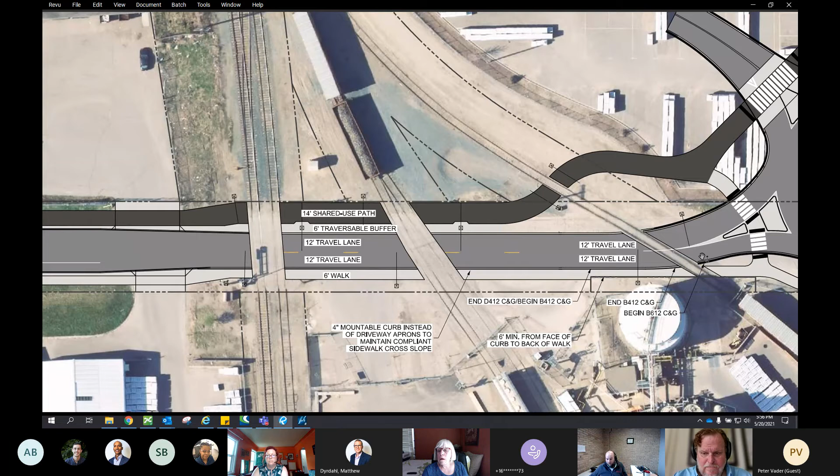We're not planning any pedestrian mazes or those little chutes that you described to get around here. On the south side, the walk would not have separate gates, but it would have roadway gates for the roadway that would descend over the sidewalk. So that's kind of how everything would line up for the railroad crossing signals. Again, our goal here is to square up all these crossings as best as possible for folks biking and other wheeled users, so that they don't fall into the flangeway gap. That's something we're trying to accommodate, especially with the shared use path over here. With the sidewalk on the south side for this last crossing, it's very hard to do. We don't have a lot of room to work with. But for the shared use path, we're getting that on the north side.

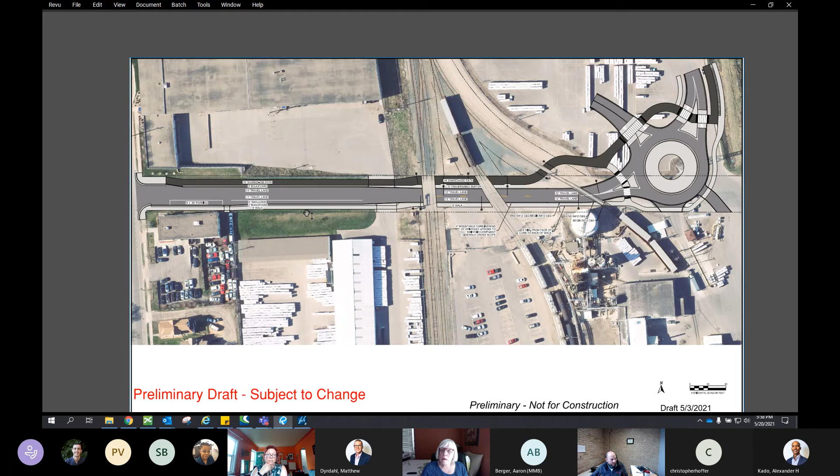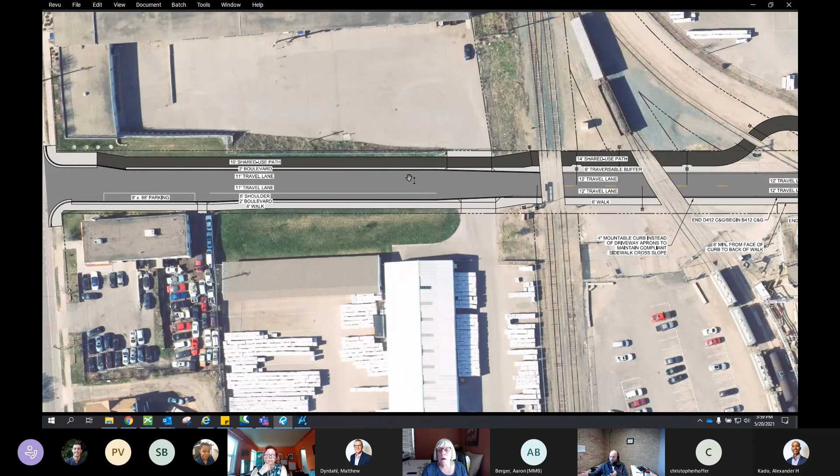Yeah, I was just going to say the turning truck movements are a major challenge, just the simple width the trucks need when they're pulling in and out of all these accesses. The other thing I'd point out is we're kind of doing this a little bit already. The idea with this 6-foot shoulder is that as trucks are waiting here to pull in, this is a spot for them to wait, and since we're only providing 6 feet, the expectation is they will extend into the through lane to some extent. So we're doing a little bit of that already. What we have beyond that is what we need for turning movements and getting in and out of these different driveways. Could it be a one-way?

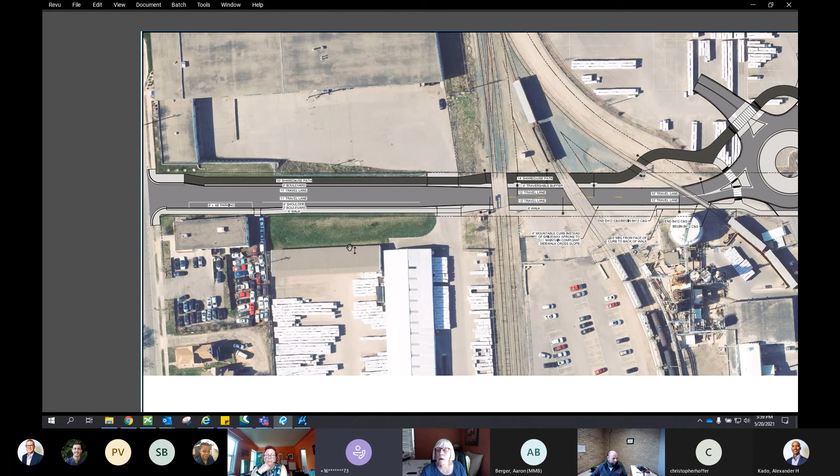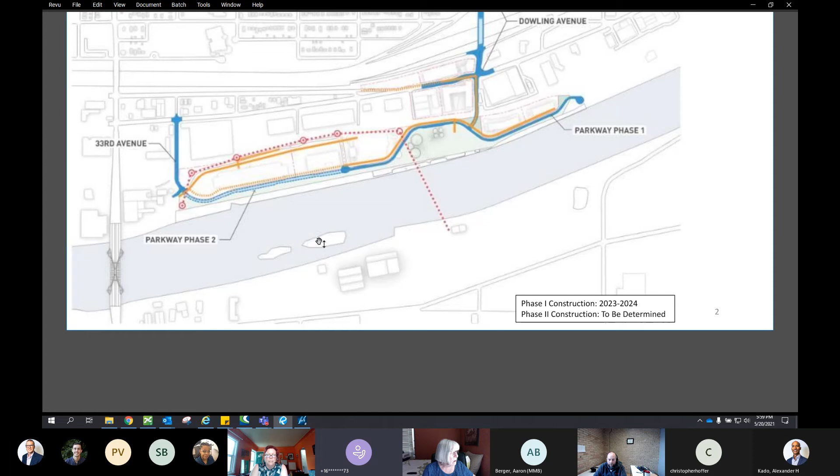I mean, we just saw that with Bryant, and it seems like complete streets is very clear that people who are outside of cars matter, and I get there's people who walk to work here. Christopher, I understand this kind of space is hostile, though I have trouble imagining being more hostile than walking along Hennepin Avenue with the number of people crossing curb cuts. But is there a way, what can we do that's creative thinking that still holds to our city policies around complete streets and the transportation action plan?

Yeah, that's a really good idea. I mean, long term, that could be a possibility. I brought up the phasing of this—phase 2, this piece right here, there's no timeline for this, we don't know when this is going to be built. I'm not seeing the— oh, I'm sorry, I'm on slide 2 of the PDF, thank you, sorry about that.

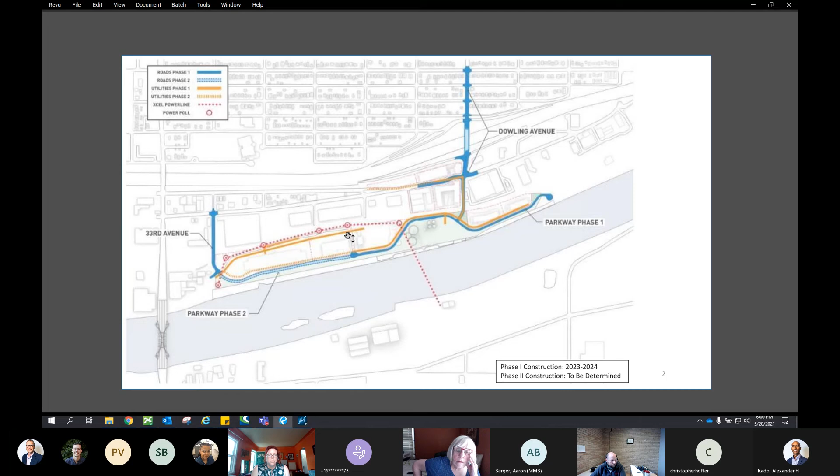If I can add, right now when it's built, it is a dead end, if you will—it's only one way in and out, 33rd. And then long term, 33rd is going to connect to the parkway, and the parkway prohibits trucks, so trucks will need to get in and out on 33rd. Having said that, if someday all those industrial users go away and we can do more things with that street when the land uses change, that might be a thing.

Or change vehicle sizes—I mean, we managed to do industry without 18-wheelers for a long time. I guess I'm a little concerned that we're treating that as sacrosanct, and we're not treating the need for mode share shift within the transportation action plan, and the urgency of our climate emergency, as equally important as a single business and the cost of a retaining wall. At least for my part, I can't see the PAC supporting something that goes against the policies we've spent so much time and effort working on, to make sure people who walk and use wheelchairs to get around are prioritized. If the policies we've worked on in our other subcommittee have no meaning, then it's hard to figure out where we're putting our time and attention.

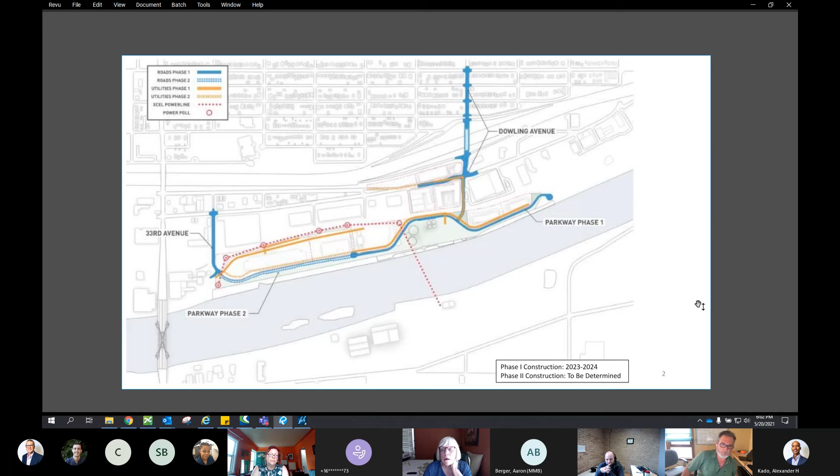Barbie, you're muted. I do just want to revisit the question of whether folks on this call are feeling okay about the southern sidewalk, knowing that it's going past all those large vehicles. To me, that's a critical question—are we feeling a lot of safety concerns with that?

Compared to where else in the city, I know that I'm walking along a street with a lot of professional drivers. I feel safer in general, knowing that they at least have some incentive not to run over me or a bike, or they face consequences. So the answer to your question is I do not have the kind of safety concerns along this stretch that I would have elsewhere.

I had my hand up for one other comment. We've been looking at the stretch leaving the Upper Harbor Terminal, but the project itself, as I understand it, is designed to be a 7-day-a-week workspace, retail space, restaurant space, not just amphitheater concerts on weekends or in summer. Since it's going to be a 24/7 destination, we really need to err on the side of welcoming people who are not driving into every route and every access point we can, including taking right-of-way and all that. I don't think that's a big trade-off.

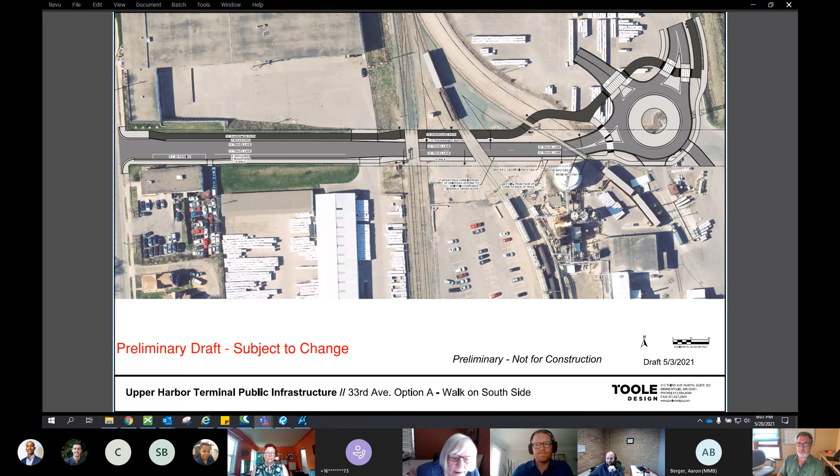I guess with being 7 minutes, that's pretty amazing - I didn't think we'd be done. Yeah, good work. Okay, good job everybody, nice work. Thanks everyone, thank you Aaron. Thank you, thank you all. Bye-bye, bye-bye, bye-bye.